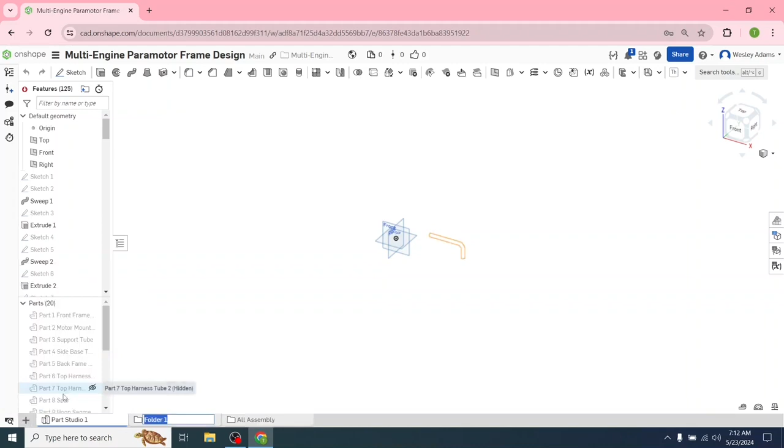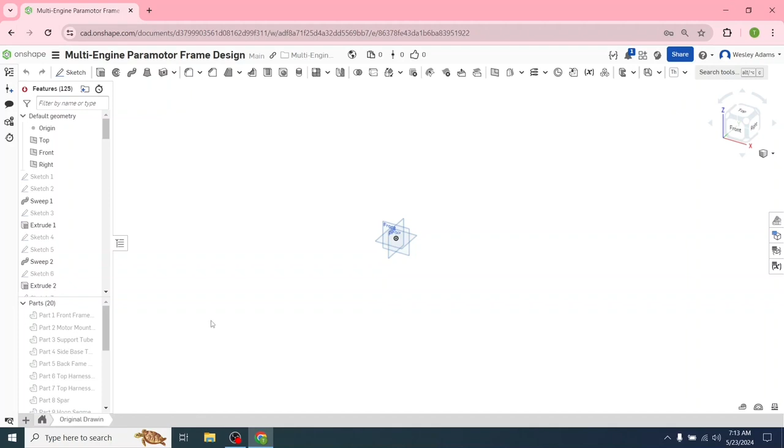So now let's create another folder. Let's call this original drawings. We're going to create drawings before we do the full scale connection print. So we're going to have to print off the parts for the full scale. And these are going to be all of our drawings that we create for the individual parts.

Now, before we go any further, let's go back, click on the Home button. That'll take us back so that we can select what we just created. Select Part Studio if you're not already in it. And there's a few changes after small scale that I want to adjust. Let's go down to the connections.

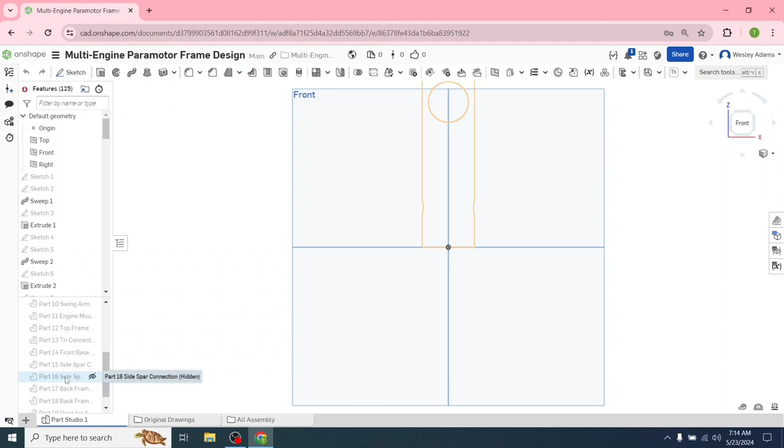So these are our side spar, and I felt like this was really too long. So I'm going to left click on that. Double click here on the drawing. Instead of 3.5 here, it's fine on the other side. Let's go 2.5. Yeah, let's close that out.

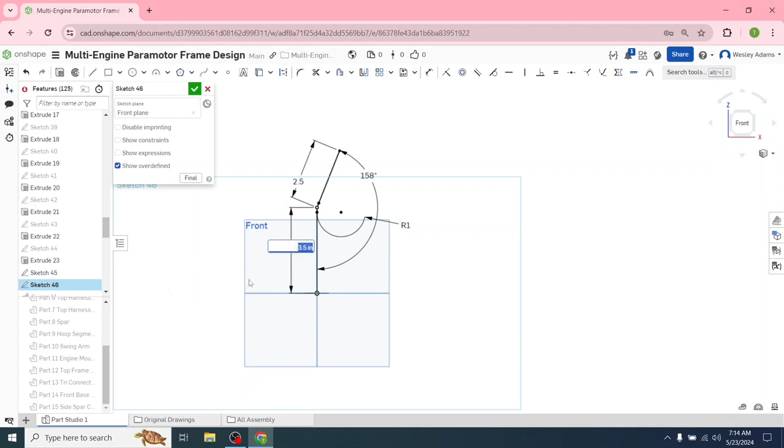Now let's see what that looks like. That looks way better. That looks more like what I had originally. Make sure the hole stayed where it was supposed to. It did. So all it did was just shorten the length. It's still going to be 3/4 of an inch from the edge. This should be the spar hoop connection.

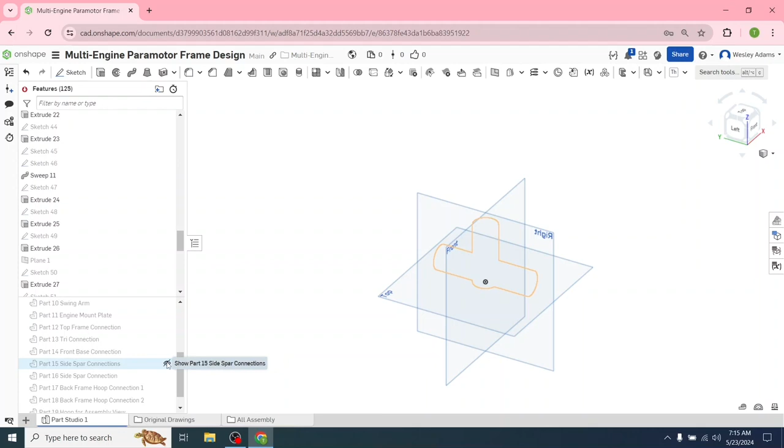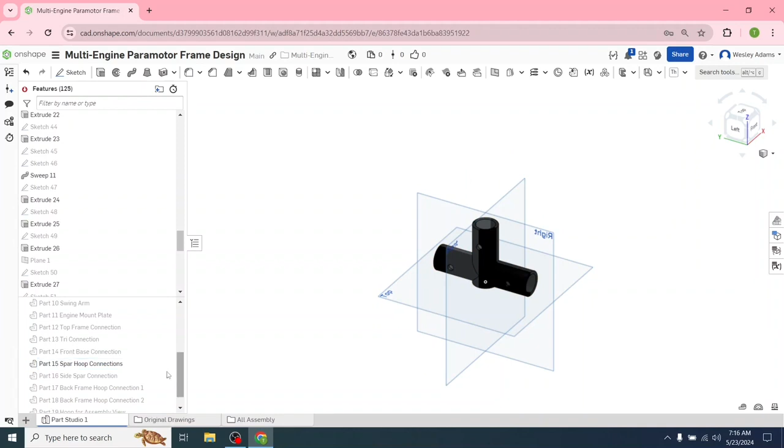Let's rename that. So spar hoop connections. These are what go on the outside of that spar to connect the hoop. All right, so those are the changes we needed to make. We're going to do each individual part. Right click. So let's go create drawing from part 1.

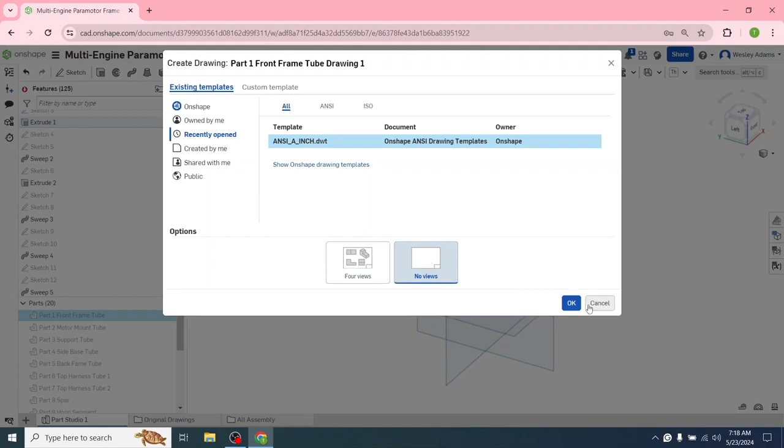It's asking us how many views we want. So you can create your own views, which is what we're going to do, or have it do it for you. Let's do each one of these. So let's go no views and hit OK. And then you notice this is not scaled in a way that it would be useful for this drawing. So let's go 1/10 scale. Let's bring this over, left click, and then hit escape. So that's going to be your front view.

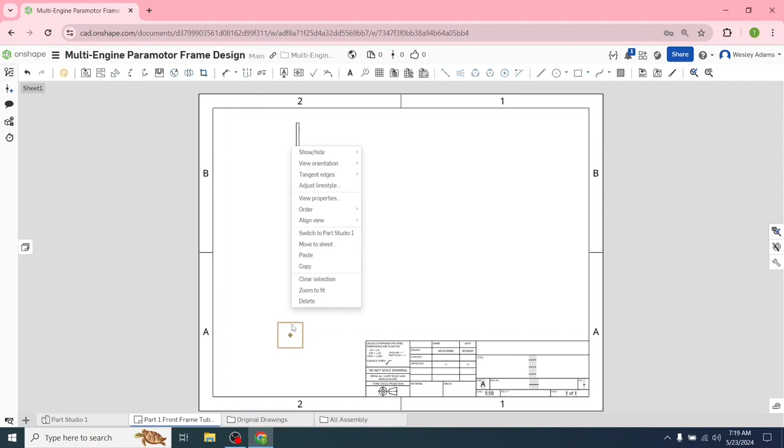And this isn't going to vary much because it's just a tube. Now let's go insert view. Let's go top view. So it's just going to be a circle. We'll place that down here. Hit escape. Now, if you want to change the scaling, you can right click on this. You can view properties, left click view properties. Go down here to the scaling and change that.

If you're like, that's way too small, I can't even see what I'm looking at, I'm going to go 1/2 scaling on this. And it'll tell the reader that the scaling is different than the other part if you change that scale from what you originally inserted.

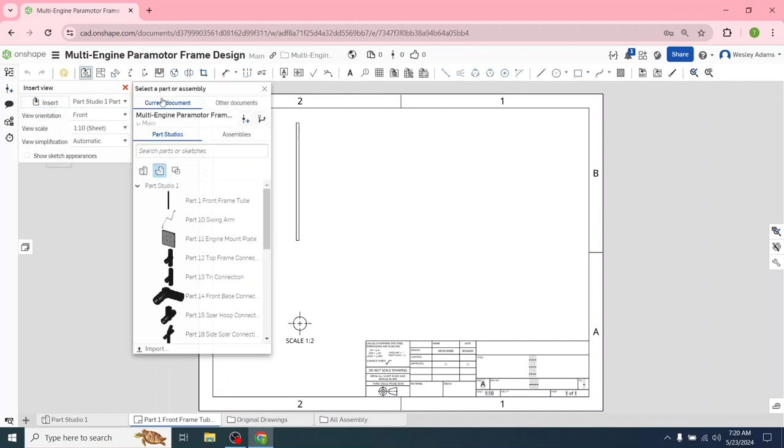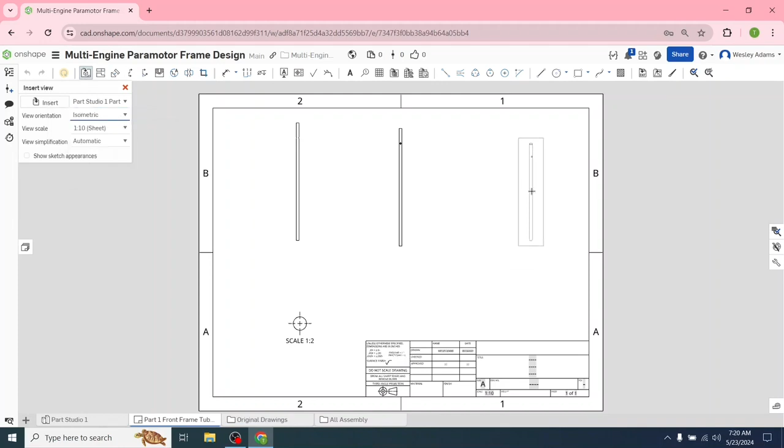All right, so let's go insert. Let's go find. Now you can change up the parts. We're not doing that. We're going to do one individual part. Let's change our view to right view. Let's just place it here in the center. Hit escape. Let's go insert. Let's go isometric, and we'll place that over here. There we go. And it kept that 1/10 scaling.

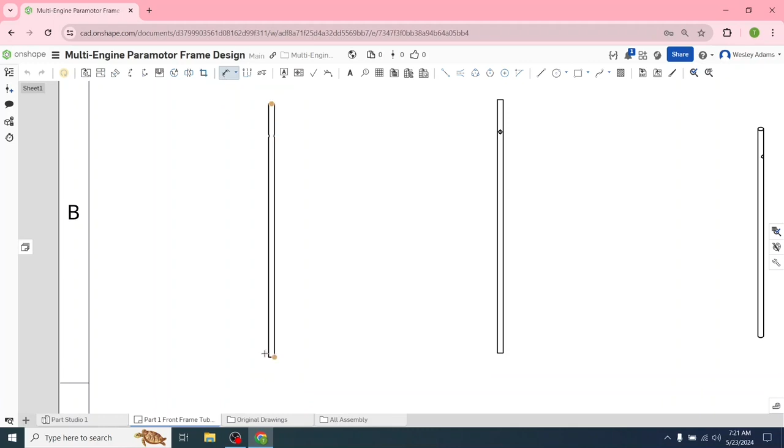All right, now let's do some of the measurements. We have a dimension tool, and this is already preset to just the normal dimension tool that you're used to. Left click on that to activate it, find a point that you want to measure, and then drag that out. And that gives you the length.

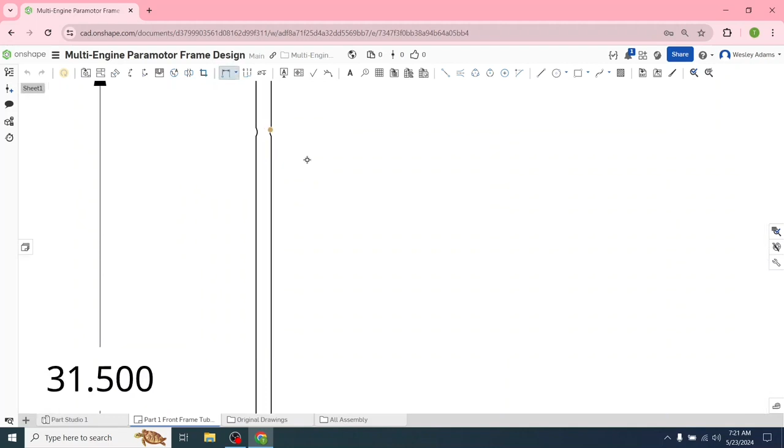Let's go point to point, or point to line. Let's do that. Point to line dimension. So we're going to go from this point here to that point. Now this won't be exact. It should be 4 inches because that point went from that edge. So let's undo that. Go up here to the dimension tool. I'll delete that because I don't want that one. Let's use it over here.

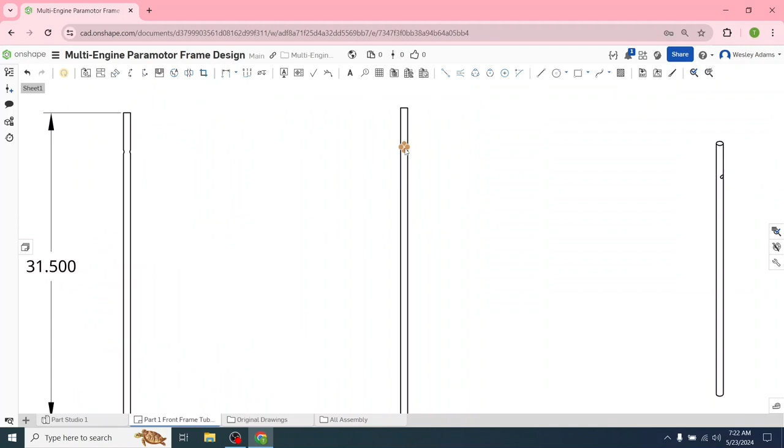It would be better. So this is from point to line dimension. So we go from that center point to that line, should be 4 inches. Scroll back out.

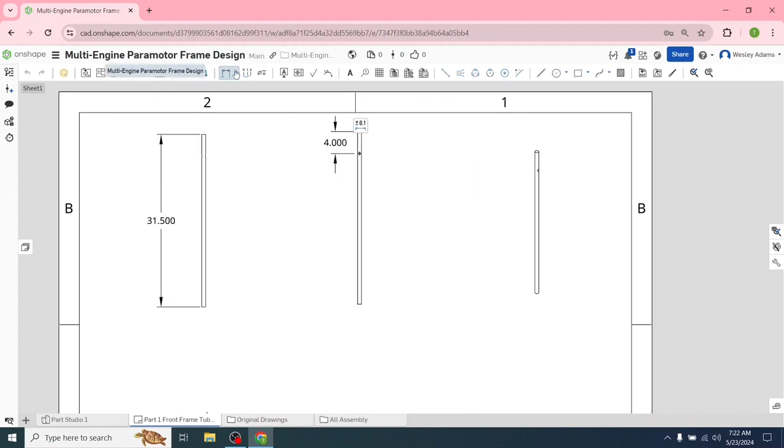Now we can go line to line. Very similar to just the dimension tool, but now we're going to go from this line to this one, and that's our diameter.

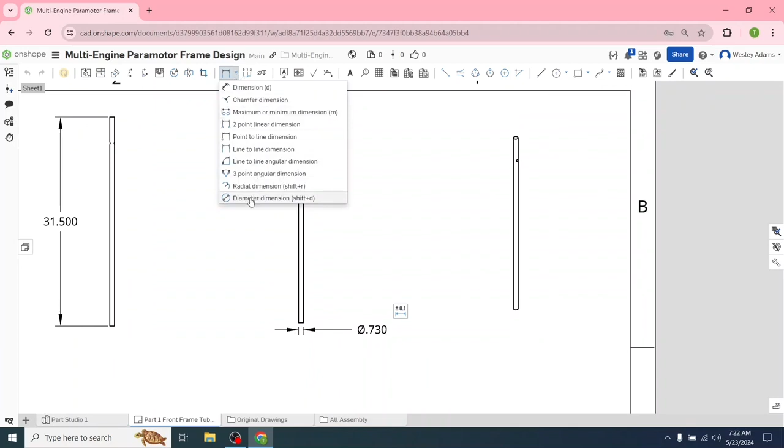Let's go down to actual diameter. And it's a very similar process. So it's saying this tube, instead of selecting both of those lines, it's just saying that whole tube is 0.73 inches in diameter. Now if you have a circle, that's the reason I did top view, and you do diameter, same thing.

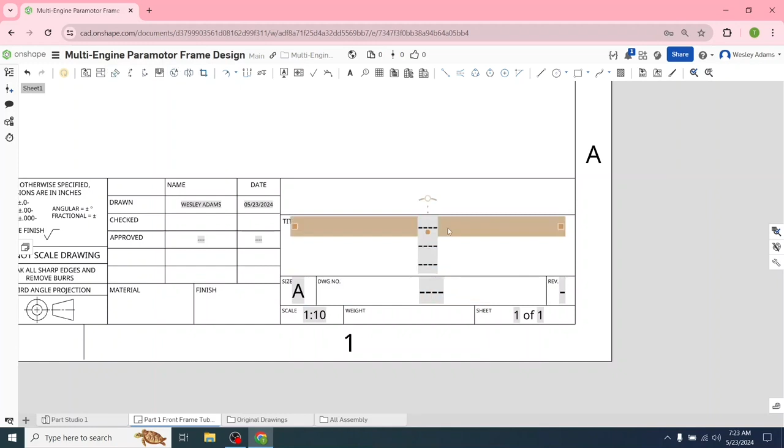You can also go down and do radial dimension. So I'm going to click on that the same way, and it'll give us the radius. Turn off your dimension tool. We'll use some of these other features in just a second. We'll just use the most common features.

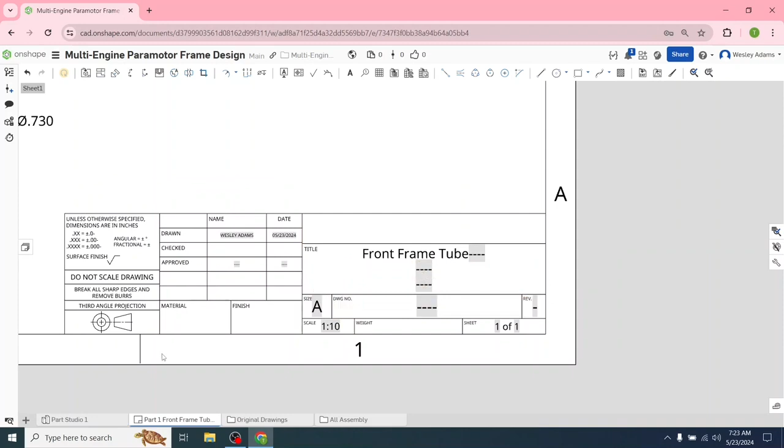Left click on this, double click, and this will be front frame tube. There we go. And you can see your names here, your date, and what other information you want to put in there. So you could give more of a description, whatever you want to plug in. We'll just call that front frame tube. Let's call that part 1 so we can keep these in order. We can easily reference what part we're talking about since that's the way we named it

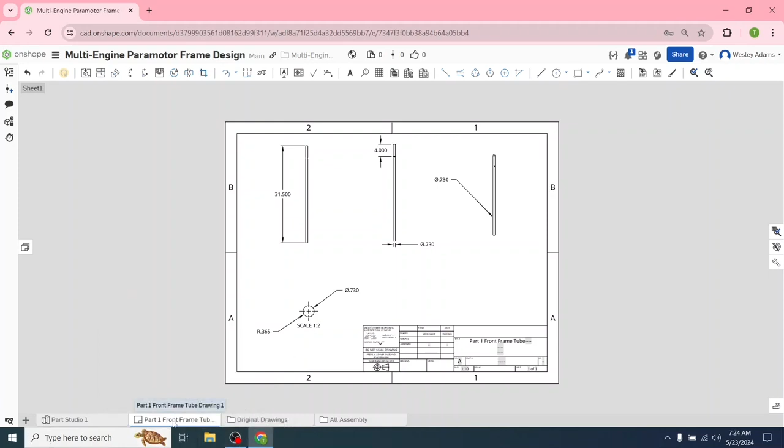in Part Studio. Left click on that, hold the left button down and bring that over into original drawings. Let's go back to Part Studio. Motor mounts, I don't think we need to do that for each part. I'm going to go in and create drawings of each one of these. And then as I get to features we haven't covered, we'll make a video about the features we haven't covered yet, because these are going to be really similar.

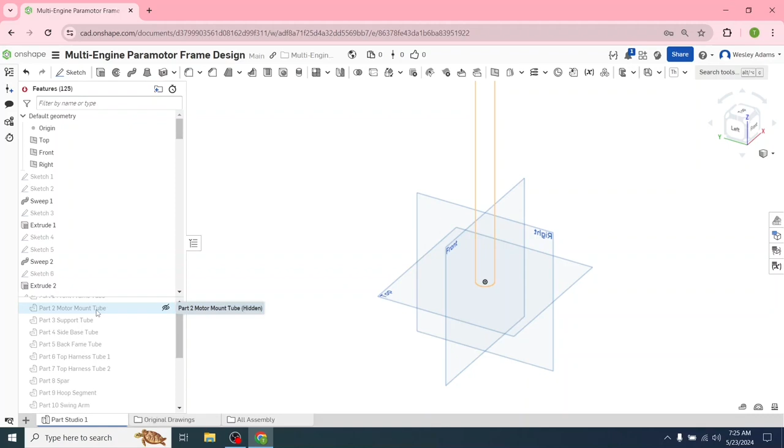Actually, let's go to motor mount. Before I do that, let's right click on that. Let's create a drawing from the motor mount. Let's do 4 views so that it automatically gives us 4 views. So you can see that other feature we mentioned. All right, so those are there. It automatically scaled it for us.

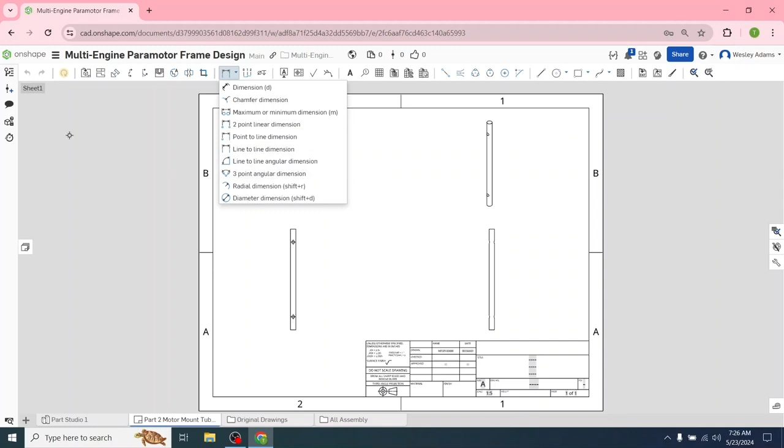I'm just going to drag these over. As you move one, the others will move. That's kind of aggravating. If you use that feature, they'll move in conjunction with each other, except for the isometric one. So as I move that over, this will move. And then you can use your dimension tools the same way. We'll use these other tools once we have something with an angle. All right, so that was the motor mount.

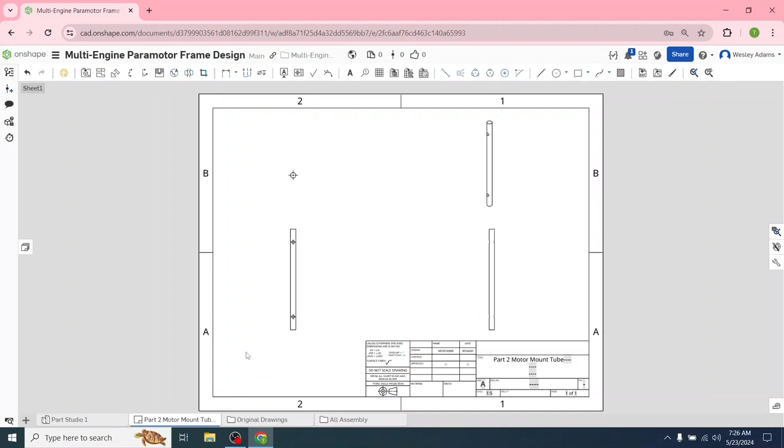We'll deactivate that tool. Left click here. Let's go Part 2. Motor mount tube. There we go. Close that out. And then I'll take Part 2. Let's create a drawing of Part 3. Let's go in and do our 4 views. If we don't like one, I'll show you how to change it.

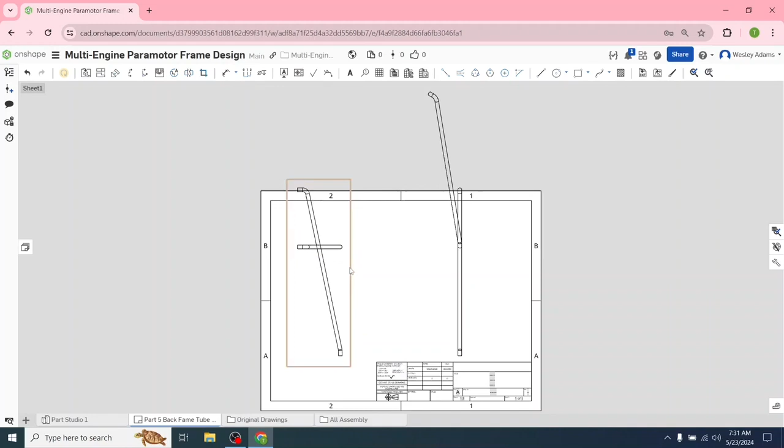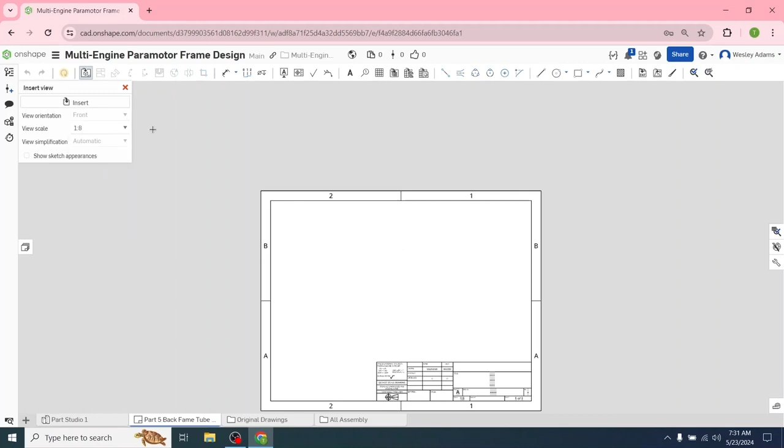Now, here's the issue. If I move this around, this is why I don't often use that tool. Let's say I drag this one around, that one's going to move. We'll change it from here. So the reason I normally start off with a blank slate is so I can insert these one at a time, and then if you make an adjustment, move it around, it's not as big of a deal because the part doesn't move around. The other parts won't move around that are paired with it because there's nothing paired with it.

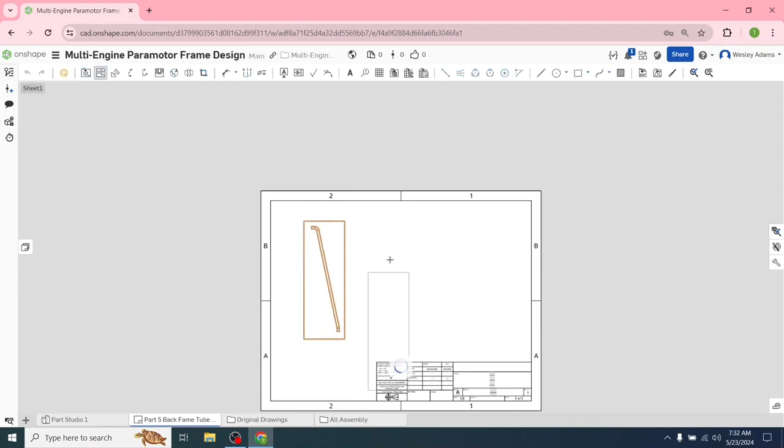So let's go down, let's find part 5. I probably looked right at it. Right there, there's part 5. So this is our back frame tube. We did scaling, 1:8 scaling. Let's click on that. Now it's asking us to go ahead and insert another one based on view. I don't want that view, so I'm going to hit escape and I'll just do these manually.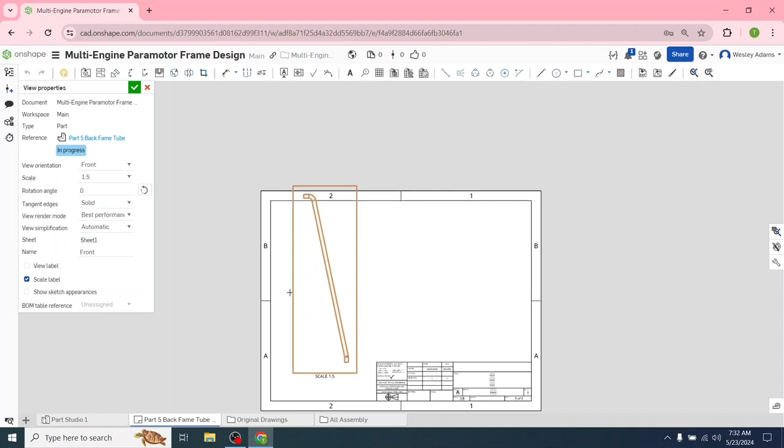So I can right click on that if I don't like the scale on this, because it's really the side view that I want. So I can go view properties. Let's change the scale. So the sheet is 1/8 scale. If I change anything from that, it's going to mention it at the bottom just to let the viewer know that, hey, this is not the scale of the rest of the parts on the sheet. Let's see, 1/4 scale or 1/5 scale. Let's do that because I want this to be a little larger, a little easier to read.

We'll place it here. Let's go ahead and insert another part. Let's go to isometric view over here and let's just place this one. That's going to be that 1/8 scale that we used. And you notice down here at the sheet it says 1/8 scale here.

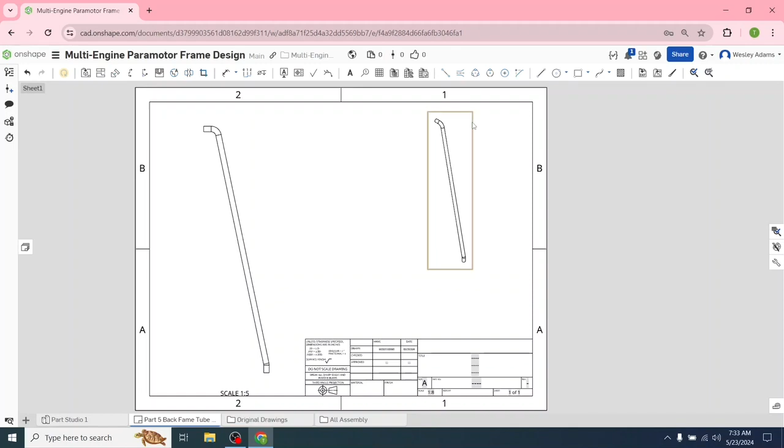I'm kind of covering it up, but down here at the bottom on scale it'll tell the reader what the scale of the sheet is. I'm going to leave that there, and I think the only other angle I want is a right view. Let's see, no, we want left if it'll let us. Yeah, let's do left view. The reason I want that is for that circle there, for the diameter.

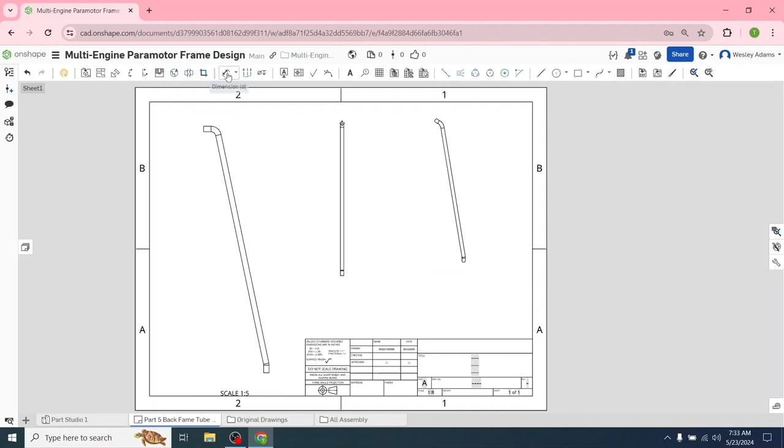So let's use some different tools. Let's left click here on dimension tool and let's go line to line angular dimension. We haven't used that yet. So I want this straight line here, and I want this straight line here, and I want to bring that out to get the angle. So that gives us the angle of that bend. We'll need that when we're creating these parts.

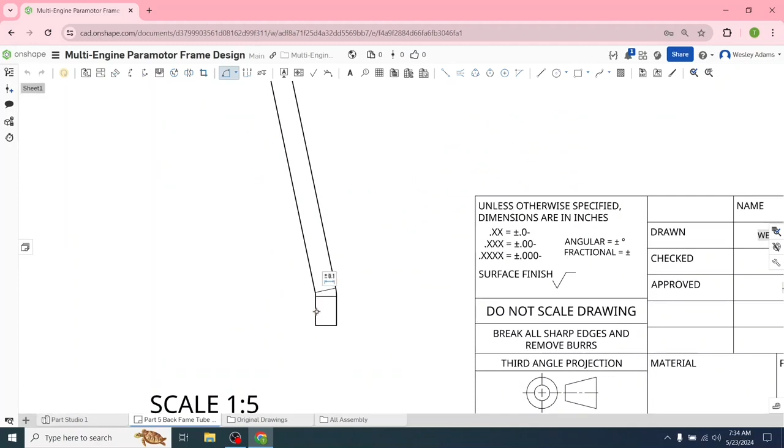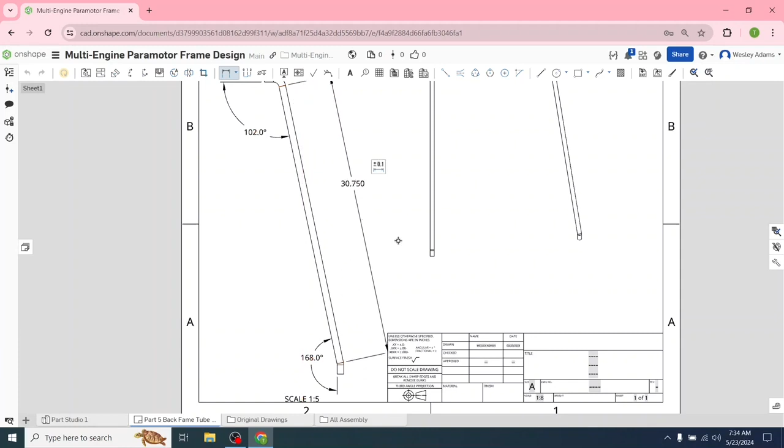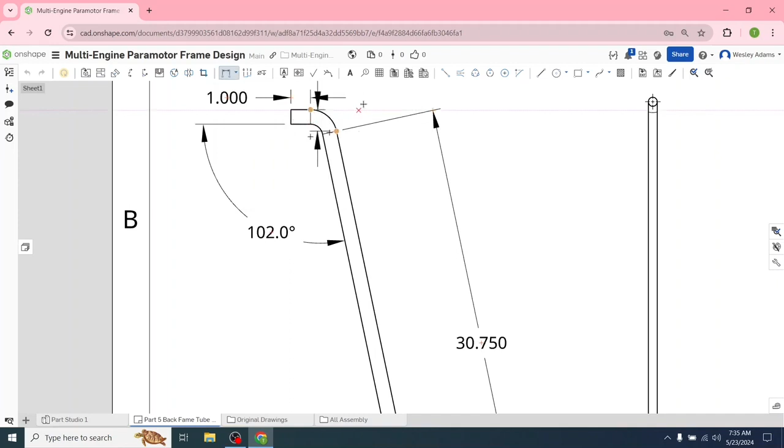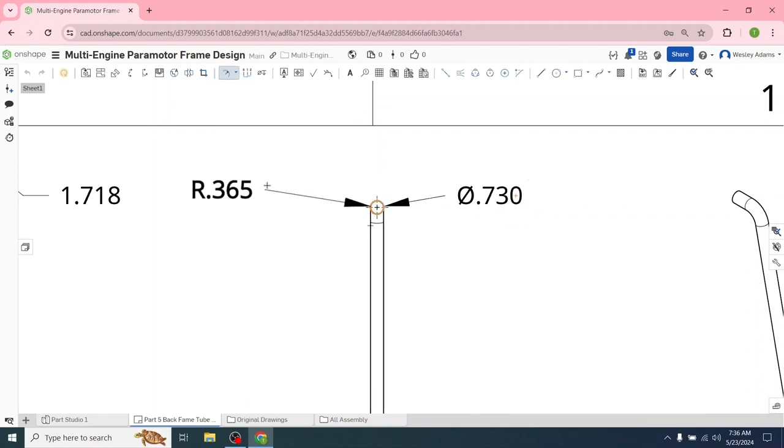So I want to go from this point to that point. That'll tell us the distance from there. Total length of the tube. So I'm going to go from this point to that point. I'm going to bring that out right there. Back in here, we've already done this. Dimension of the tube. We can do radial dimension if we want to again. Line, we could do that over here. So we could go from this line to this line, and that'll tell us diameter as well.

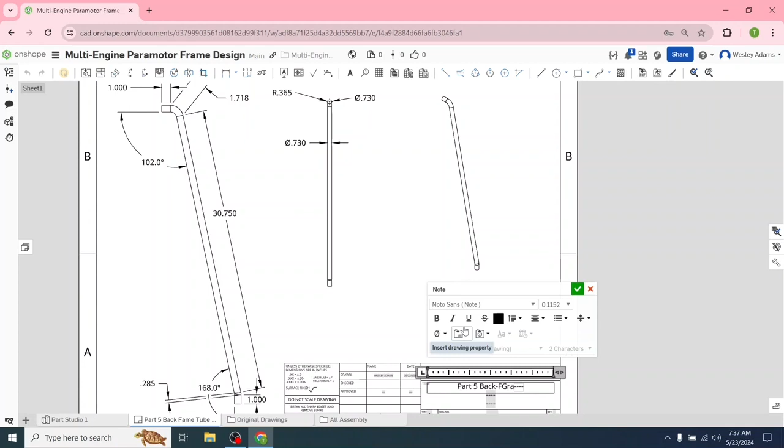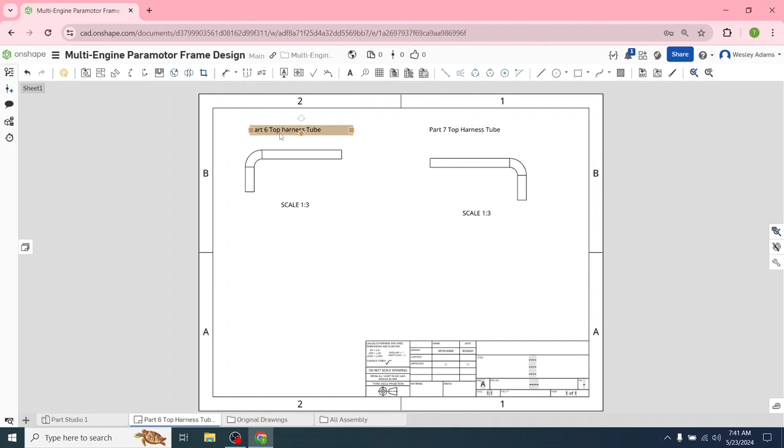All right, that gives us most of our dimensions, and then we can add the name to it. Let's turn that tool off. Let's go down. This is going to be part 5 back. So this will be our back frame tube. All right, we'll add the note. Part 7, top harness tube, and I'm going to go back in and change that other one just a sec, close that out, hit escape so I don't add another one. And I'm going to go back in here and change that one.

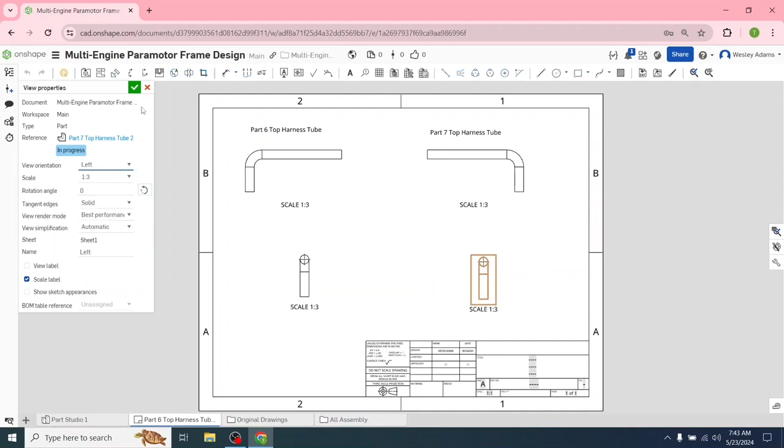So we got that. I'm going to right click on that, view properties. I want to change the angle. I think we were at left, yeah, close that out. All right, so that gives us top harness tube on this side, part 7 on this side, and part 6 on this side. All right, let's go in. Let's do line to line angular dimension. So 90 degrees. Do the same thing here. We'll get some dimensions.

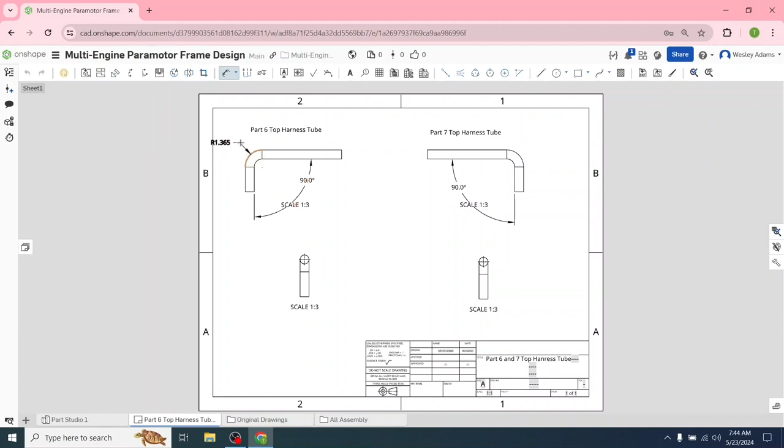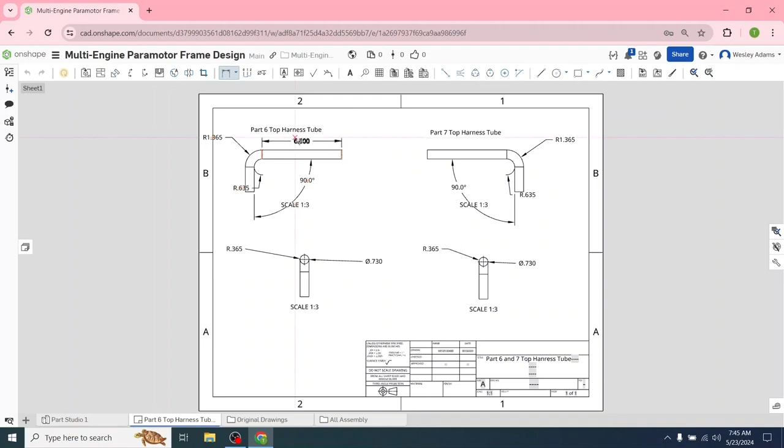See here what the inner radius of that would be. There we go. So it gives you a radius of a bend with the normal dimension tool. Let's go down. Let's do radius here. Let's do radial here. Same thing over on the other side. Wrong one. So now let's look at the total length. Let's go line to line. Let's go from here to there. Same thing on this side. And if this is in the way, close that out and we can move this up here just so that it doesn't look so messy.

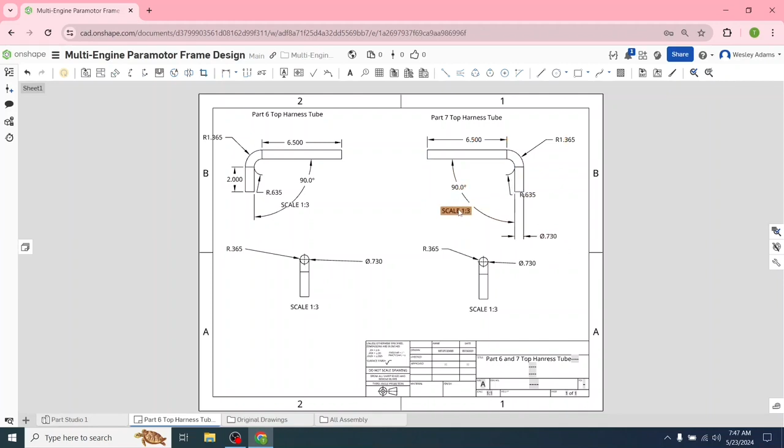2 inches here so that we'll know the diameter. I'm going to move that scaling over here so it's not so messy on this side as well. And we can do the same thing over here and get the diameter so that we have that, because they're essentially the same part. Let's not do 1 to 1. Let's go 1/8. Let's see what that looks like. That looks good. Hit escape. Let's go insert. Let's go isometric. Let's put it over here. It's not going to look much different, but at least we can see the differences between the two.

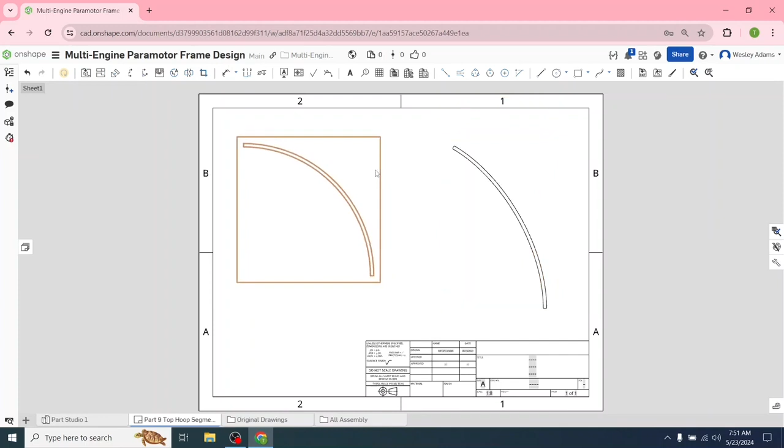So let's look at diameter. So let's scroll in here so we make sure we're selecting the right line. So we want this inner line. Go over here, select the outer line. And you notice that these are different. It's because we would have to take the average of these to get to 56 inches for the diameter of the hoop, because it's giving us the outer diameter and the inner diameter.

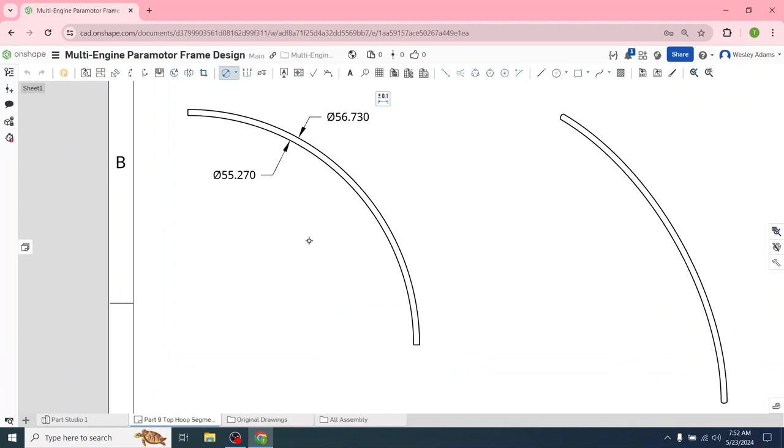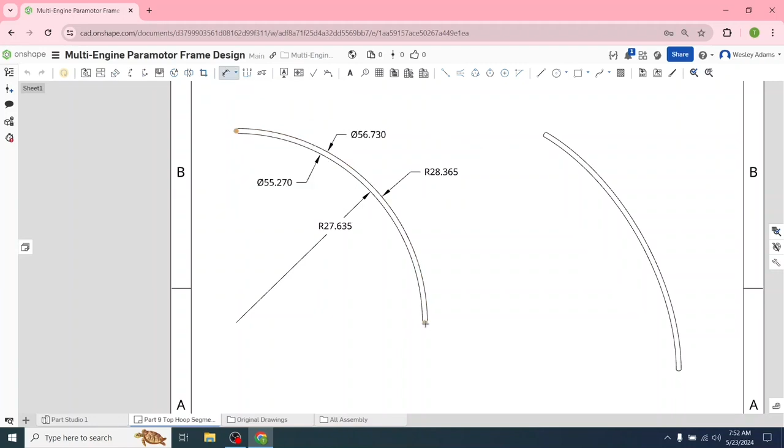We can also go to radial dimension. That's useful here, and the same thing applies where we would want to select both sides and then take the average of those two. Let's go to the dimension tool, from here to that point, and it's telling us that is 28 there, which is our radius.

So let's do 3-point angular dimension. Let's go here, here, and here. There we go. So that's telling us this is 90 degrees, like a 90-degree segment. That's what we want. That's going to be useful if we're doing the arc length.

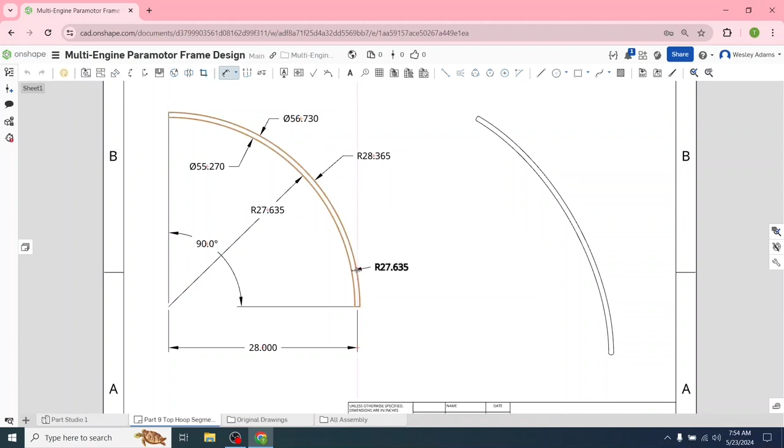Turn that off so we can move this around so it's easier to see. So that would say this is a 90-degree segment of 360 degrees. Dimension tool here and here just to get the diameter of the tube itself. Let's change that view to right view. There we go, that'll give us a better estimate of if it's going to fit on there.

All right, let's close that out. It's good there, and I think this will give us enough measurements. Let's go in and do our first dimension tool. If we go from here to there, it'll tell us the length. We're probably going to need another one of these because it'll get messy. 7 inches there, 5 inches here.

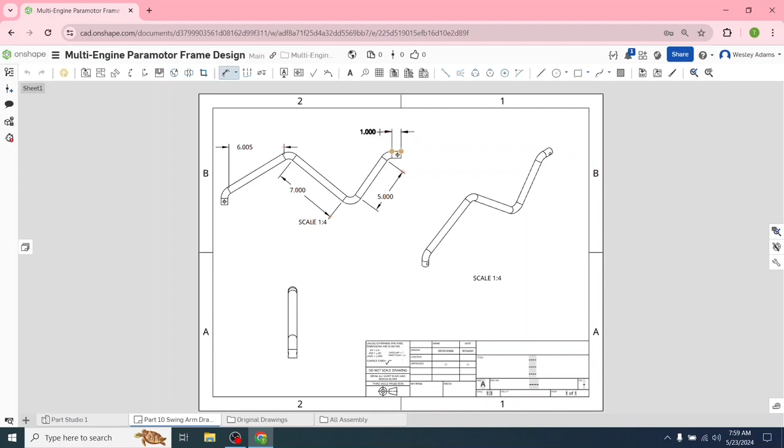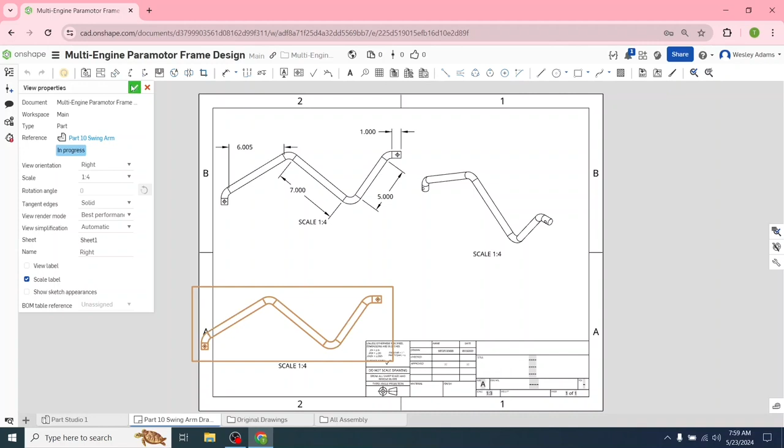And then that would tell us from here to here, we got 1 inch. All right, good enough. Right click on that, view properties, and let's do the same angle here. Let's do right view at a quarter scale. Should have just made the whole sheet a quarter, and then we wouldn't have that little note, but that's okay.

Close that out. The reason I want 2 is I don't want it to get too messy. We've got our dimensions up here. We'll go ahead and finish those out. Like if I went to line dimension, I could get an estimate of length on that.

We could go back in. Let's just use this one to get an idea of length, so let's go 2 points here. And that'll give us an idea of the length of this tube needed. We could add these up and get a rough estimate.

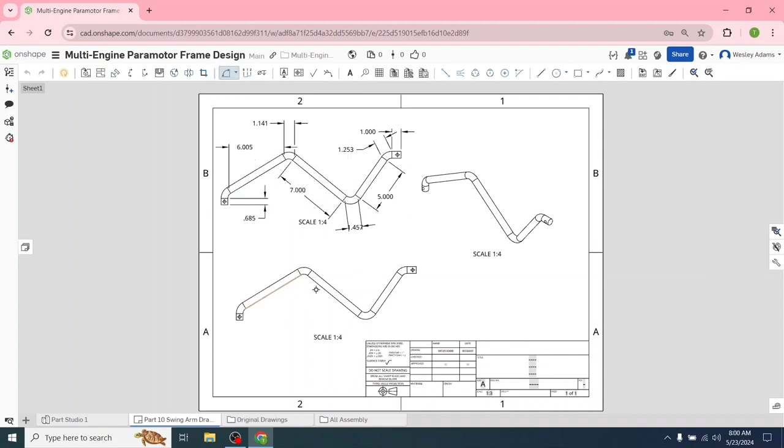The reason I wanted to create another one is now we can go line to line angular dimension. That'll give us an idea of degree of bend on each one of these.

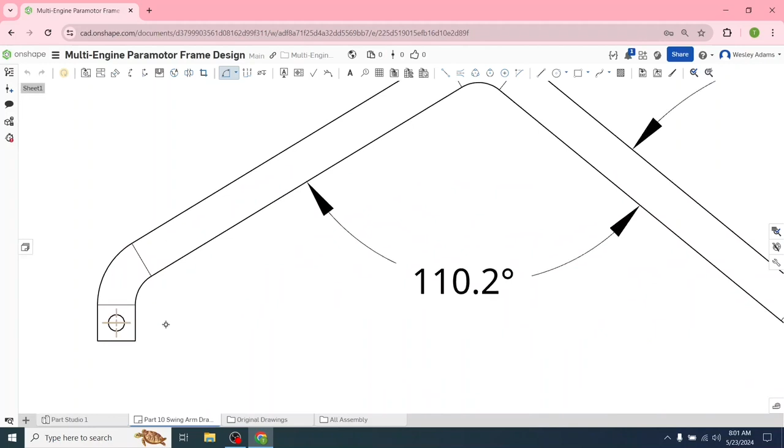And I'll do this one here too, if it'll let me highlight it. I don't want that, highlight there. Oh man, let me zoom in so that'll be easier to select, and then there. So that gives us an idea of the degree.

Our radius of the bend, we could come up here and do radial dimension. I'll move that around in just a sec. It's going to be 1.

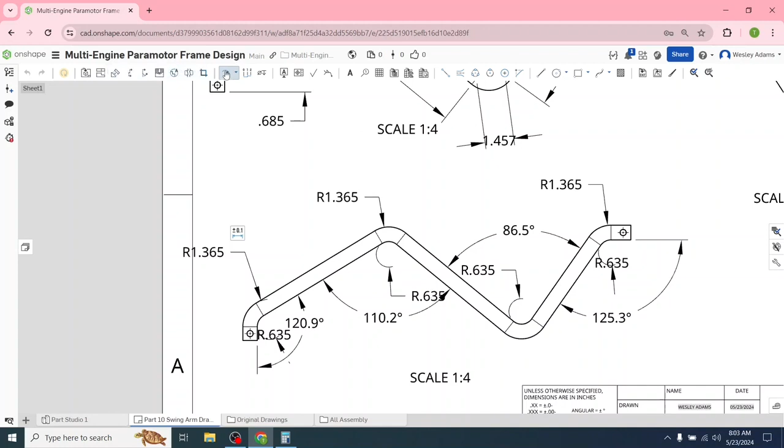Remember when we created this, we did radius of the bend at 1, but we're doing the inner portion and outer portion of that tube. So let's just look, let me turn that off for just a second. Let's look at these two numbers and I'll show you exactly what I was talking about. So if we go 1.365 plus 0.635 equals, divided by 2, we're going to get 1. All right, so that looks good.

I don't want it to get too messy and put too much on there. If we needed to do another distance, like if we want to know how far apart or the diameter of that hole for drilling, again we just go diameter. That tells us that that is 0.314. I believe that's an M8 bolt that would go through there.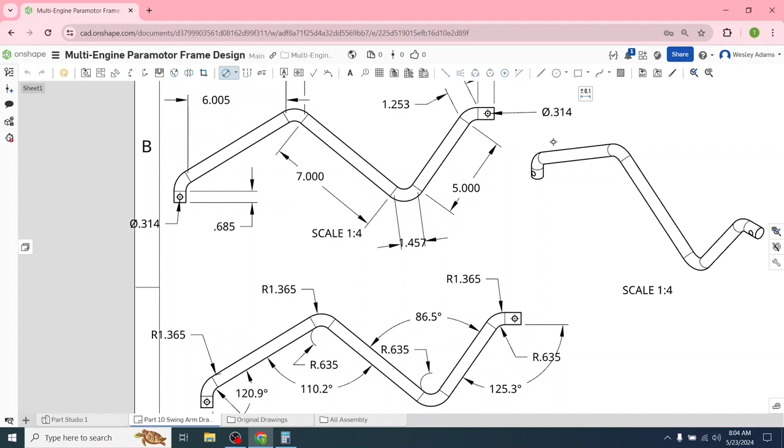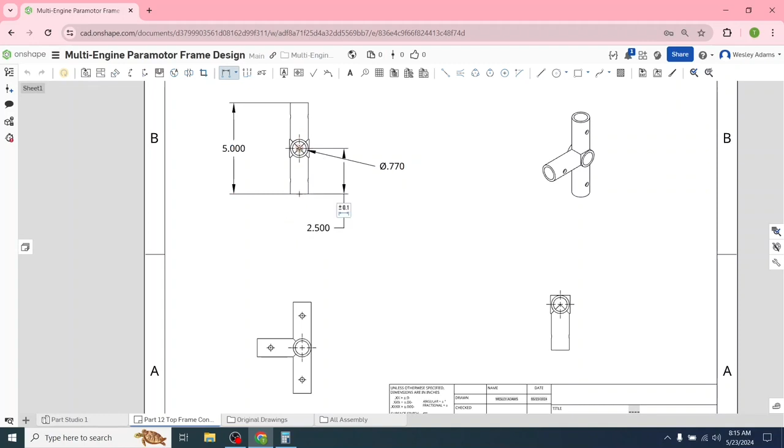Here I can get a dimension of length. I could go in and do diameter of the tube. Remember we did those at 0.77 just so they would slide on easier. We could go in and do point to point, so 2-point linear dimension. Click on the center there, get an idea of the distance between those two. And this can get messy real quick.

We just did the engine mount plate and we had to create 3 different views because it was getting really messy. So we had to do the outer bolt holes. I'll just show you, we just created that. So we did these outer bolt hole measurements first from each edge. So we did our outer dimensions of the actual plate itself here.

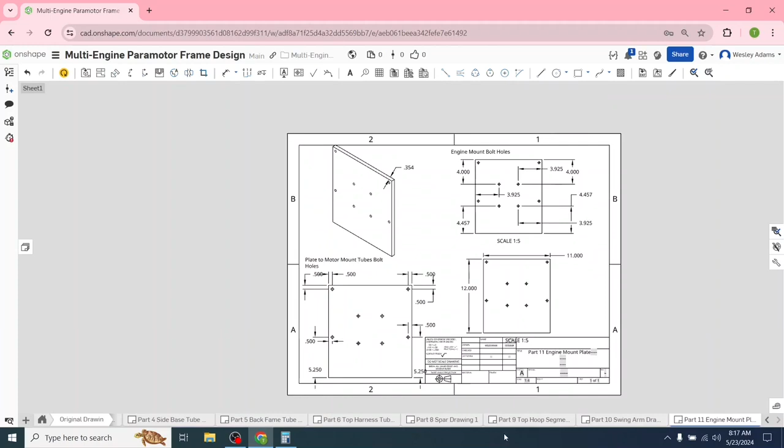We did the width of the plate here. And then we did the engine mount, where the engine's going to mount, we did the bolts, and we had to label these so that we had an idea because it got really messy real quick. So we're going to do inner diameter here. We're going to select the outer part here, and you can do that for each.

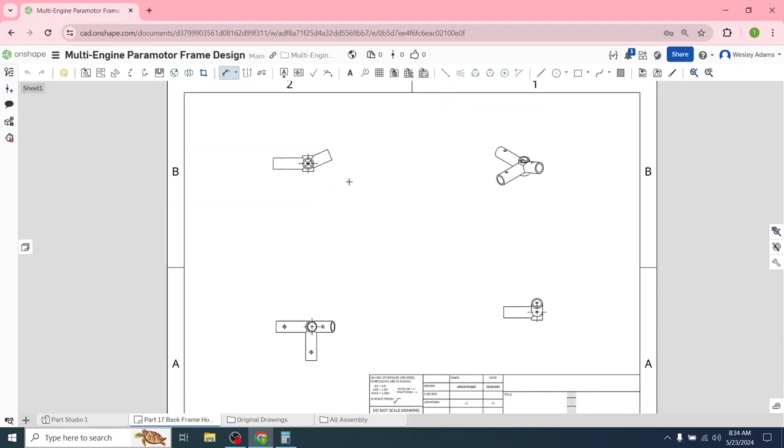So this is our hoop for assembly view. It's not an actual part that we printed off, but it is useful for dimensions. We can go out here, inner, outer diameter. Those would be averaged - good just to get an idea of total size. This is our radial dimension for both of these, inner and outer, and again we take the average between those two.

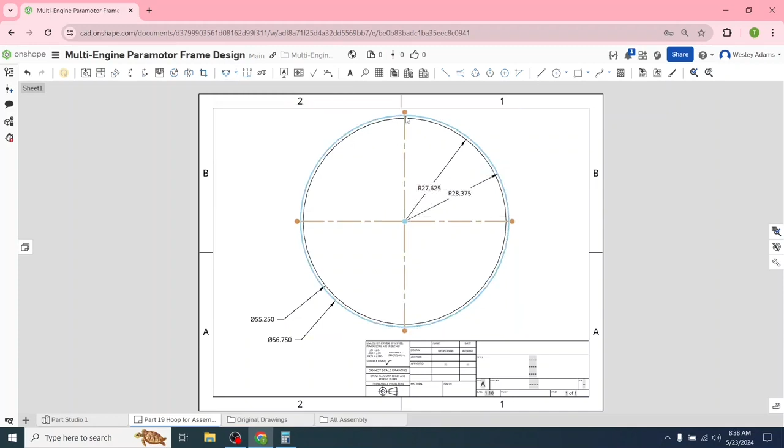We can do the 3-point angular dimension. I don't think I talked about this in the last video - the order that you do this in is important. So I did center, outer edge, and then the second outer edge. What that's going to give me is the degree, which is useful for arc length to determine, based on that angle, what's the length or estimated length of that tube. We can plug it into that formula.

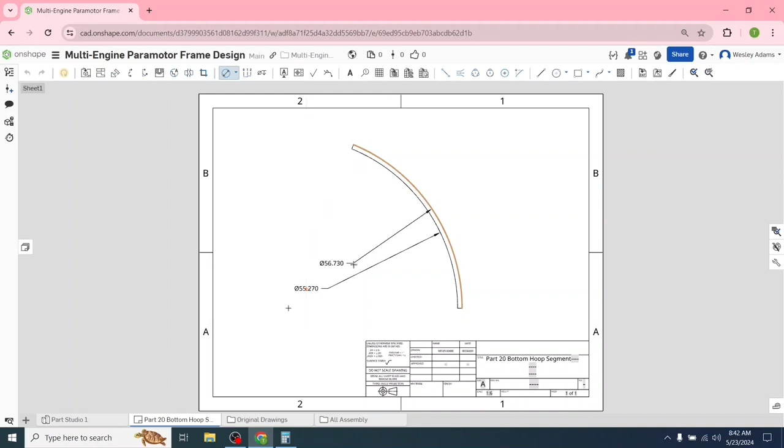It's a different size than the top hoop segment - this is the bottom hoop segment. So we would take those two and average those together to get our diameter. I'm going to turn that off and just move those down here so they're out of the way. So we have to average those two to get the true diameter, again useful in formulas and estimating length of tubing needed.

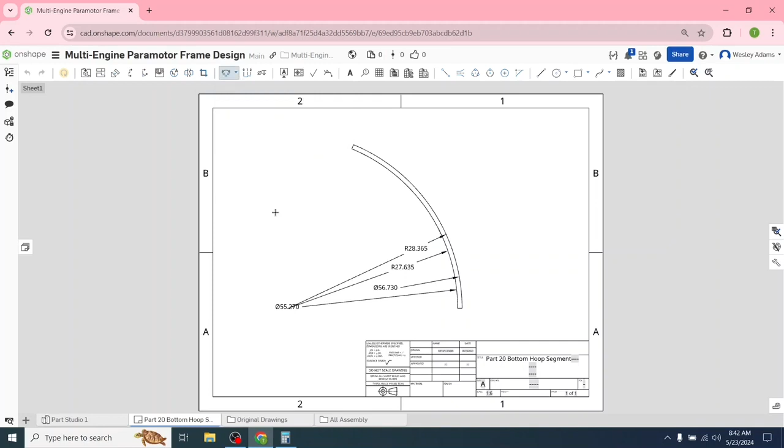We'll go down to radial dimension, place it here, and do the outer one. Then we'll go back and do our 3-point angular dimension. The order that you do this is important, so we're going to select right here, here, and here. 68 degrees is what we would need for our formula. If we plug this into arc length, we would also need diameter or radius, depending on which formula we use.

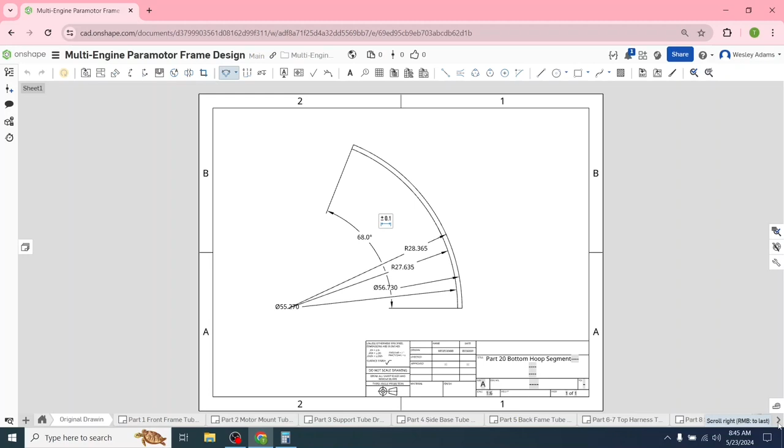Original drawings - we go in, and I'm going to scroll across. You see these arrow keys on the far bottom right hand side. Notice we go from part 1, part 2, part 3, all the way through all those parts. Some of these parts were similar, so part 6 and 7 were like that - I just renamed those to represent it. But we have all of our parts together. Same thing for part 17 and 18, very similar parts. We had a mirror image, so I just included those because they would have the same dimensions.

Even the hoop segment for assembly view was included, but those are our parts. You can see why I put those in a folder, because if we had those in our original document, it would get very confusing having all those laid out, trying to navigate, going to the other assembly views. But by placing everything in a folder, same thing for all of our assemblies, it allows you to organize your workspace so it doesn't get away from you.

Now, the reason we did the drawings before we did the full-scale assembly and before we printed off the full-scale connections, was so we needed to see if we needed any changes, plus we can print these drawings off and/or pull them up on a computer - either way, I've done both. And as you assemble it, if there are changes that need to be made, you can make those real time. If you need to see where the bolt holes are drilled, what's the actual length of tubing you need to cut, these drawings are very important for that stage of the process - not only recording changes real time, but also being able to see your measurements.

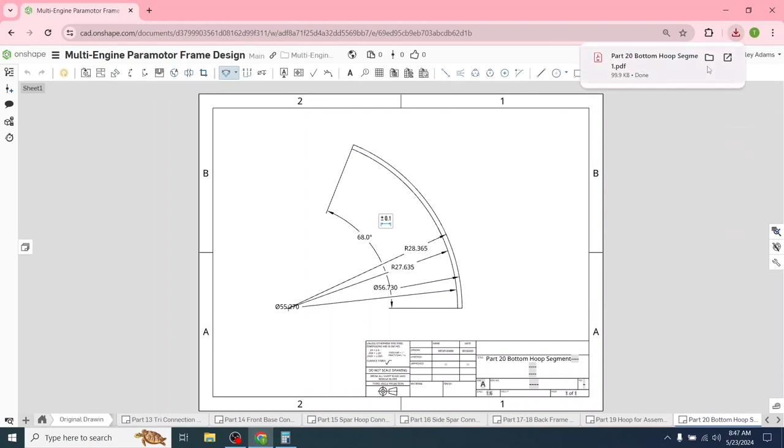So right click on your part, let's just do part 20 since we just finished with it. Go export - and very similar to exporting a part, but now we're going to be exporting as a PDF, and hit export. Then it downloads, and once it downloads, you can go to that location, open that up, and save all your drawings in a folder.

That's exactly what I'm going to do. I'm going to export all of these out and save those in a folder, and then we can print those off so that we don't have to take our computer out into our shop and risk damaging it there or getting it dirty.